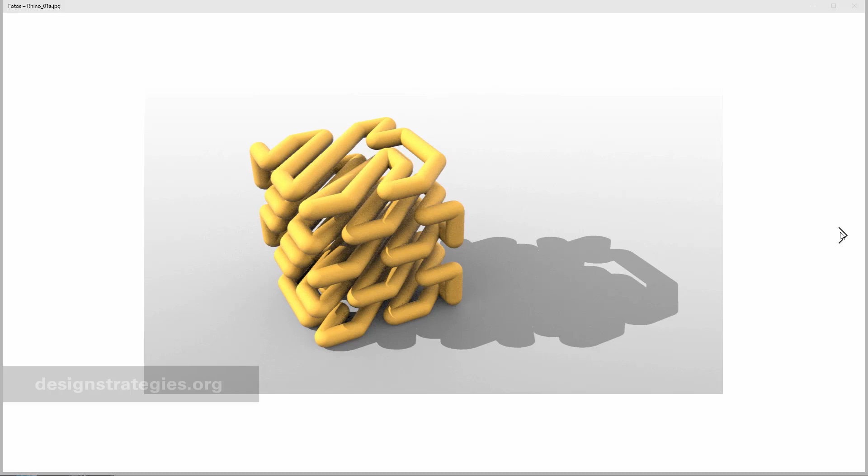You can also show the dimensions in your visualizations or renderings, and also the edges. You can also integrate background pictures, panoramas, and integrate this in your environment.

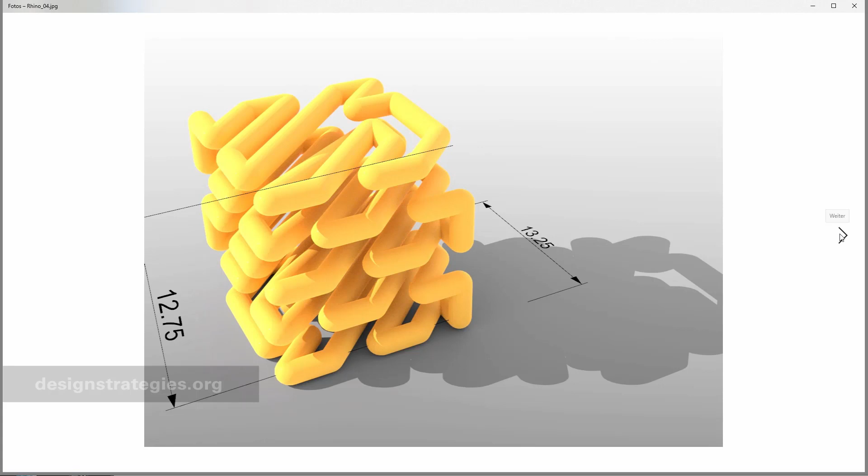You can also use the new Cycles GPU renderer, which gives really nice results if you have a fast graphic card. You can also just use technical drawings, for example wireframe drawings, or if you want a different quality, just use Make 2D to get results like this.

Okay, let's start. If you want to create visualizations, the first thing I recommend is that you go under Safe Frame and check Show Safe Frame in Active View, because this guarantees that at the end of the day you know what kind of final visualization you get, what proportions you have - it's the same size as your final result.

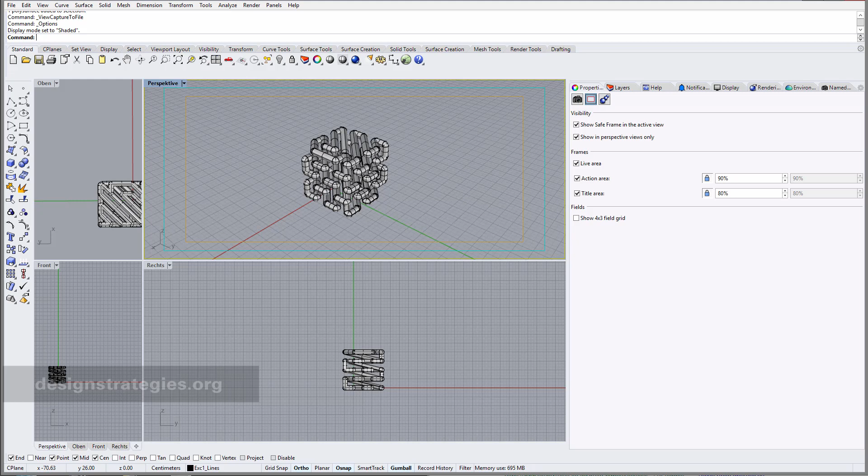This video is not about materials, but it definitely makes sense to give your object a nice material. I just select my object and in the property setup under materials, I go on material, and I don't want to use the layer material.

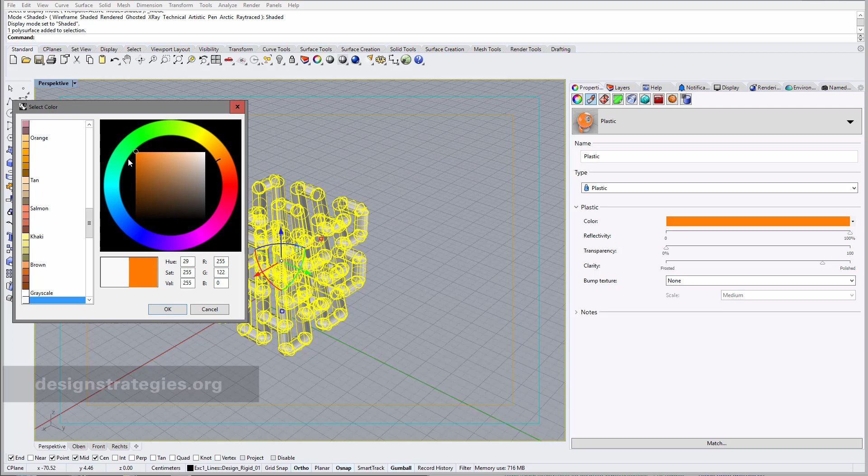I just use a new material, and then I have a long list of options to choose from, and I just choose plastic, which is fine. I'll give it a color, for example orange, or whatever.

You can already see it in the preview. Bump texture - I choose some dots, and we just see the final result in my visualization.

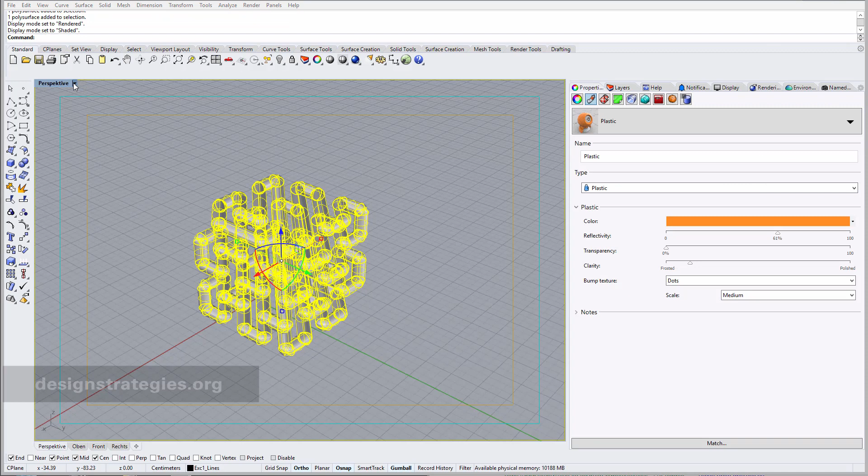And if you then change in your viewport setting with this little triangle here from shaded view to rendered view, then you can already see the result.

In Rhino 6 you have two nice options for creating a rendering. You can do it while you're in real-time viewport rendering - you just go into this pull-down menu and choose capture, and you can capture to clipboard.

And then you can copy it into something, or you just go into capture to file, and you have different kinds of settings, resolution, and things like this. We'll talk about this later.

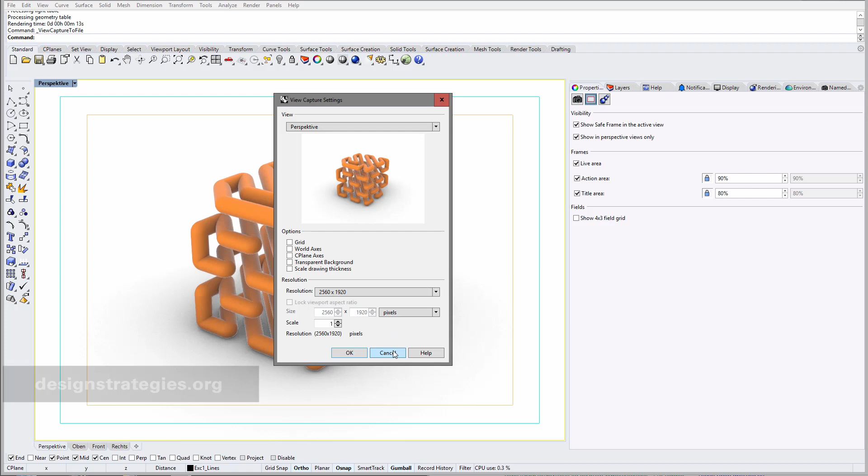Or you can also go into your render settings here in the right menu. This is more the traditional way, and there are a lot of options. We will also talk about this a little bit later.

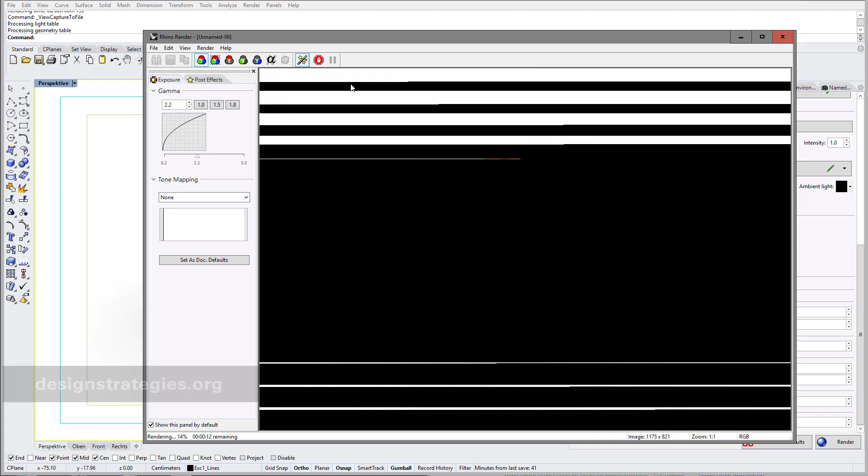And if you set this up all properly, you just go into render and it will open this kind of render menu, and it will be the traditional standard rendering in Rhino.

I think most of the time you do your basic settings in your rendering menu, and then you just use the viewport renderer. You can see what kind of options you have - you can use it for wireframe rendering, and if you go into capture to file, you just save it as your wireframe. You can choose shaded view, or rendered view, which is really fast.

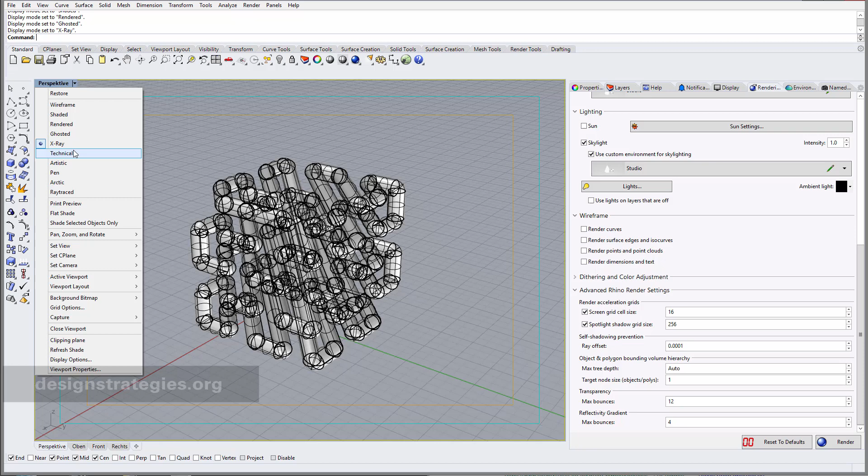You can use ghosted, you can use X-ray, and important to me, you can use technical. Technical is sometimes quite handy for these kinds of technical visualizations.

You also have other options. Artistic, not really interesting for me. Pen could be interesting. Arctic, not interesting.

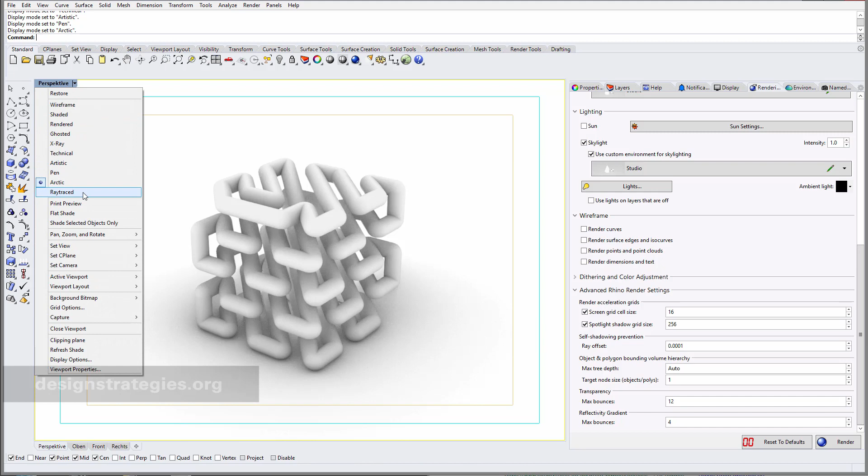And really important is the ray traced view, which is new and based on a GPU Cycles renderer. If you have a fast graphic card, this is a really good option to get really nice visualizations.

We'll talk about this Cycles mode a little bit later. I want to stop this - you can see my mouse, and there's something like a play and pause button. I just go on pause, and this is how you stop the process of your visualization.

You can already see the dotted elements I set up in my material. I just go into my settings again and choose technical, and I want to show you a few things. Every display mode setting has settings you can change.

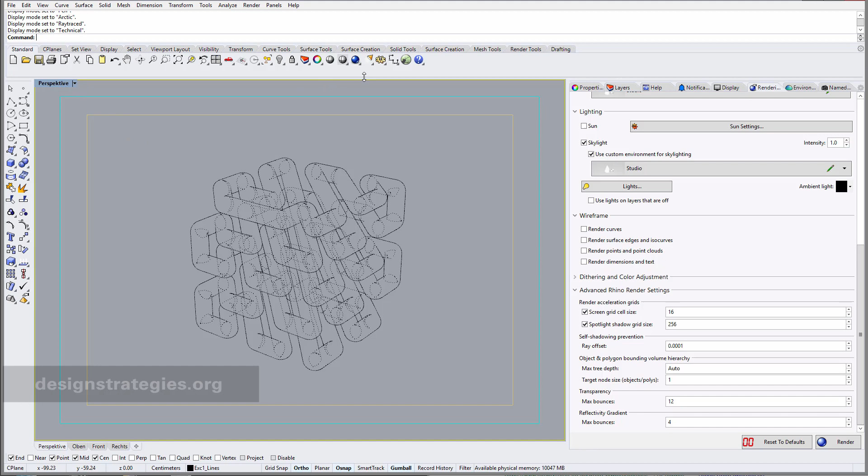If I go into options, you can see the Rhino options will open. You can go into views and into display modes, and we'll just play a little bit now with our technical settings. In our technical settings, you can choose the background.

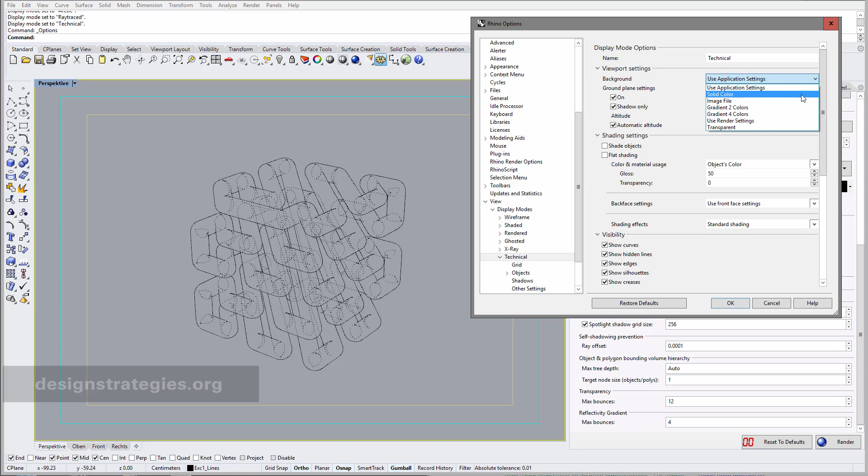For example, just say you want to have a solid color, like white - makes sense. Can also do it for black. You can have a ground plane and have the same as in your render settings, which is set up here, which also makes sense.

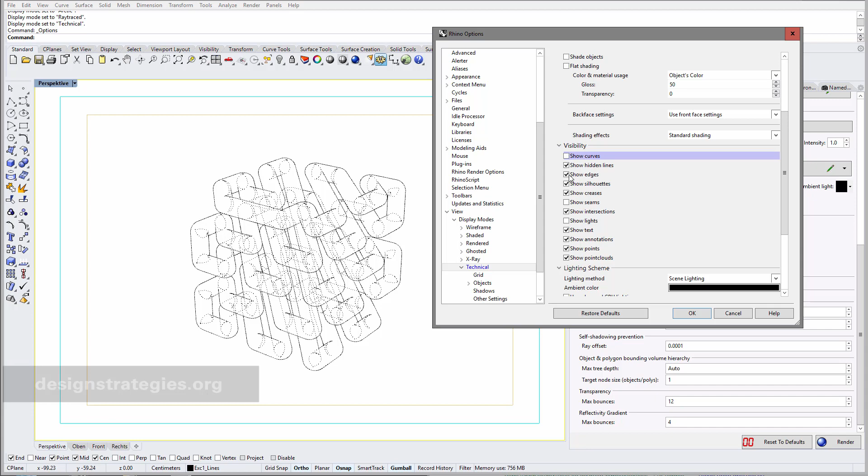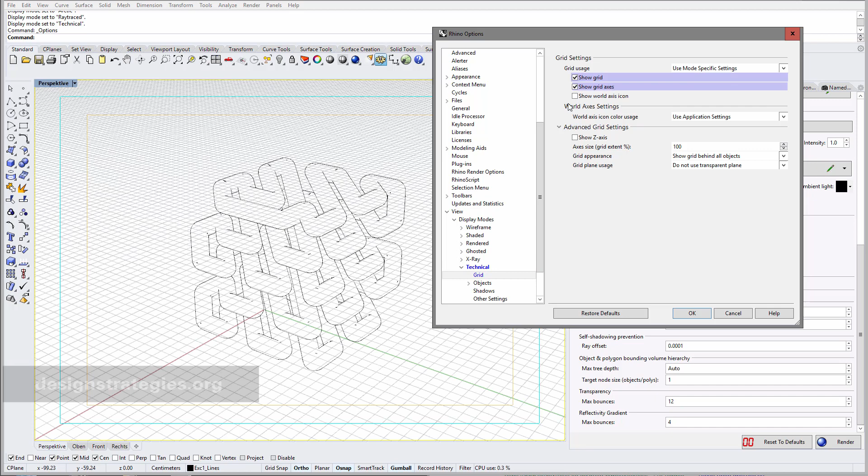There are also other things you can do. You can say show curves or show edges, and you just see what is happening. Show silhouettes, show creases, and hidden lines. Let's switch this off, so you can see that you can design your settings. You can also just say that you want to have the basic grid in the background, or the grid axis and world axis. So there are a lot of options already in your technical view, shadows and things like this. Just figure it out, makes sense to be aware of this.

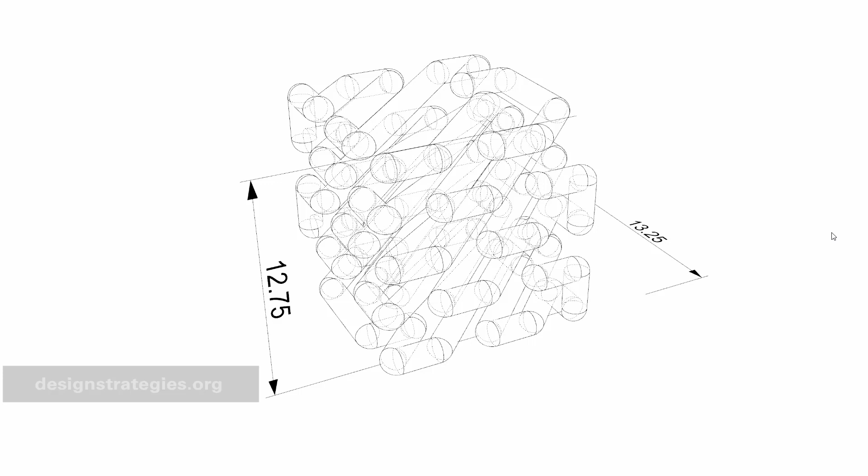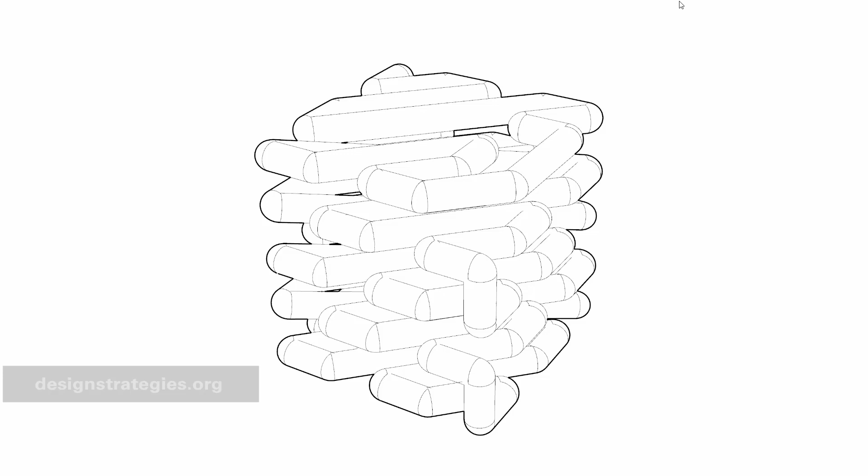One thing about technical drawings: if you save them and make a visualization out of this, sometimes it can happen that the lines are quite thin and it's difficult to adjust this. So in this case it's better to make a 2D projection and then be able to work with the thickness of the lines. I can just show you how to do this.

Okay, I have my model. I can change it, for example, now to a shaded view. Anyhow, I have it selected. I just enter in my command line Make2D. Okay, here we go. I want to have it from the perspective, and I want to have the view from input object. Here you can also choose what you want to see. The hidden lines probably I don't want. I want to have the scene silhouette and things like this.

It creates its own layer. By the way, I activate hidden lines, and it creates its own layer. Okay, here we go, just take some seconds.

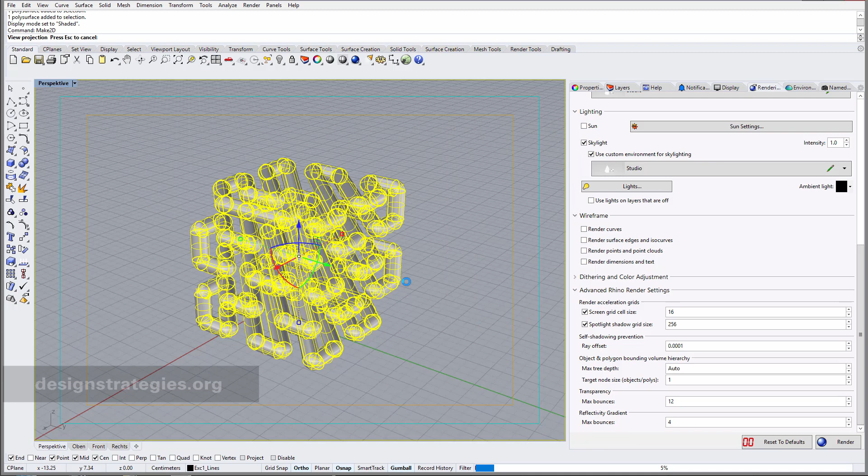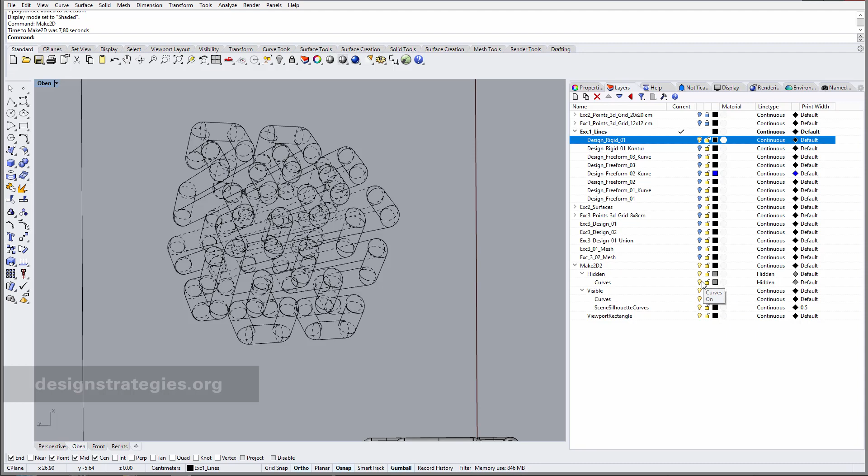After calculation of my Make2D, I just change to my top view. By the way, double click, and double click on my top view. If I now look into my layer manager, you can see a layer called Make2D, and you can still switch on and off, for example, the hidden lines, the curves and the silhouette. These are all things you can still adjust.

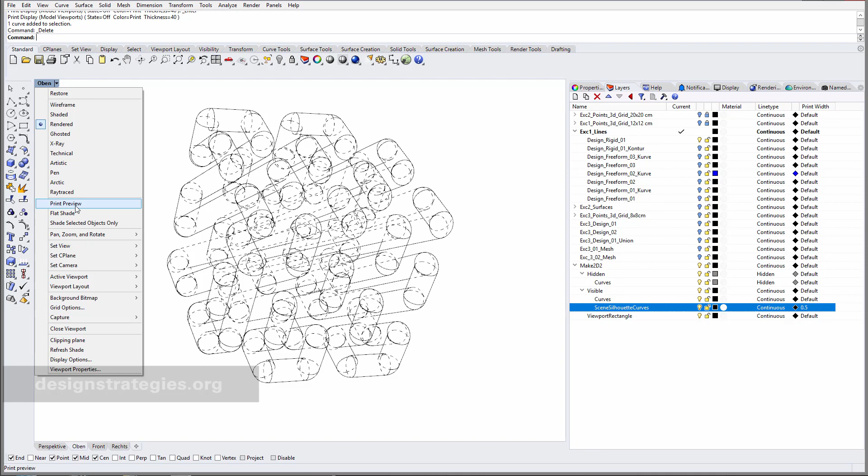But by default, these are all print width for printing. Because of performance reasons, you don't see it in your viewport, and then you also will not see it in your visualization, so you have to switch this feature on. Just go into the pull-down menu and say print view and rendered. Then you can already see that it changed.

If I just change my scene silhouette curves to another thickness, like 1 millimeter, then you can see the difference.

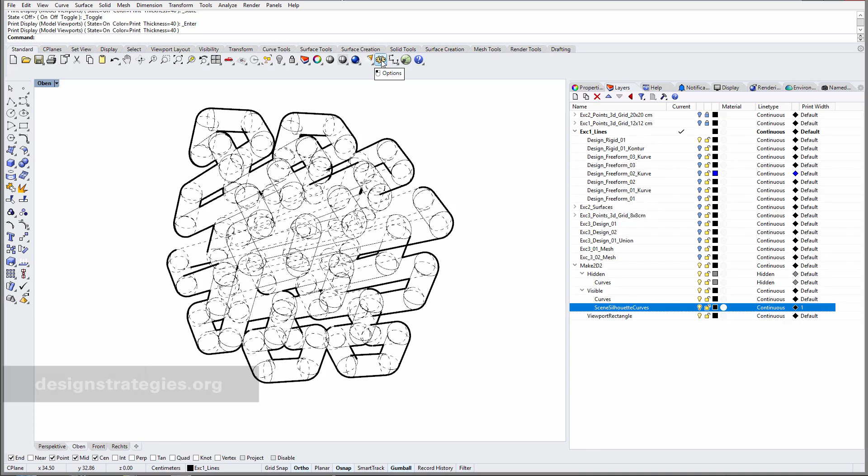If you want to save it as a transparent visualization and you are just in rendered mode now, then you have to go into your option menu, and under rendered you change the background, and instead of using render settings you just go into transparent.

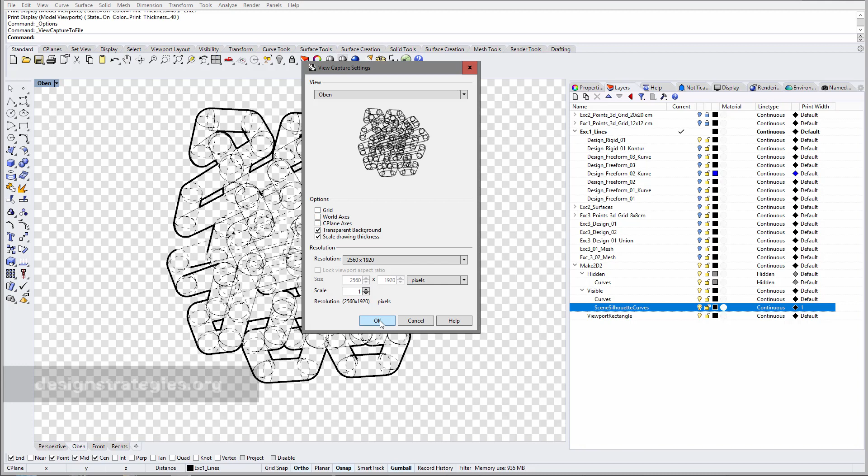Okay, here we go. If you want to save this for working in Photoshop or whatever, you just open your view capture again. You go in and see what you want to change. Transparent background I also want to change. Want to save? I'm sorry, and you just call it transparent and as a PNG, and I save this.

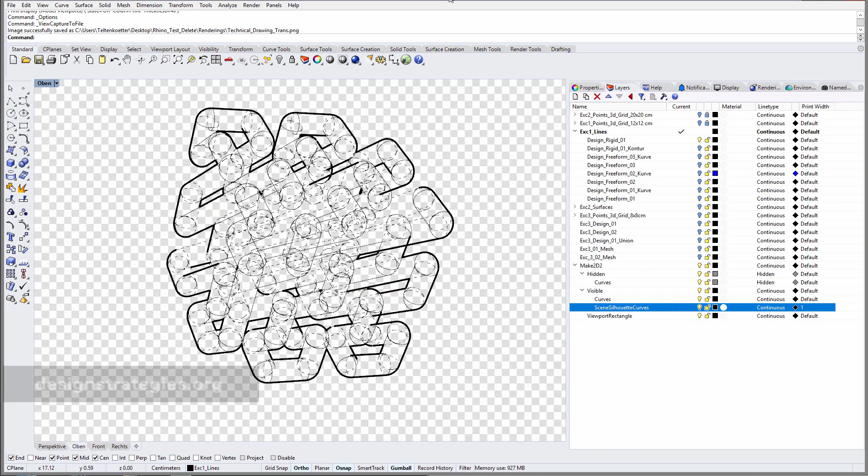Okay, I toggle again to my perspective with Control and Tab, and I have my perspective. This I just want to delete, and I also switch off my print view because it just takes render time.

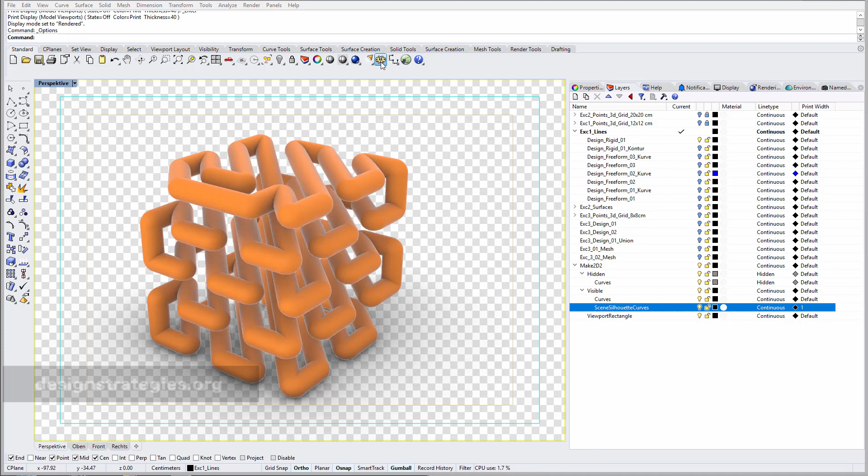Good to know, for all these settings, for example like rendered, there are a lot of options to control what we already did. We changed the background from transparent to, for example, a gradient. Now I have a gradient of 4 different colors. There are many other options.

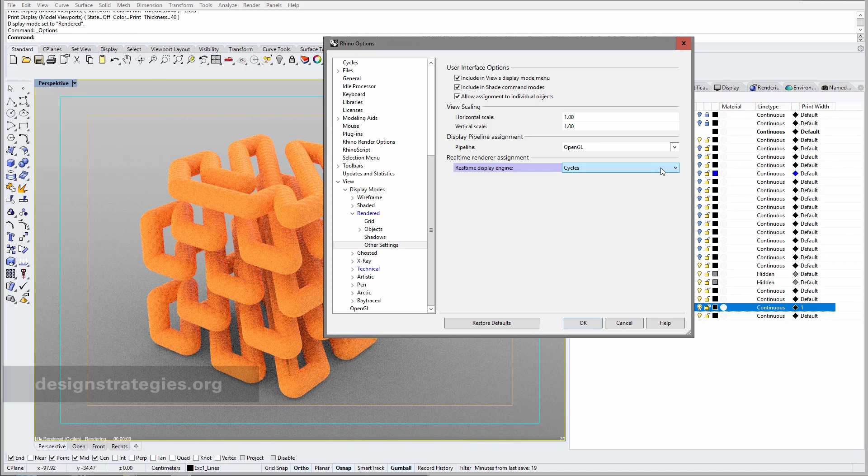There's probably one thing worth showing. The normal rendered view is done with your non-real-time renderer. There's a new renderer called Cycles. If you switch this on, then it will change to the new GPU cycled renderer. It's the same as what you find in your pull-down menus as ray trace. So at the end of the day, the whole thing is just a setup, and you can see that you can change the name of the setup, and you have a lot of flexibility in working on this.

When we next talk about ray tracing, it's also interesting to see everything under the Cycles menu in your Rhino options. You can see my graphic card is a GeForce GTX 780. If you have a GeForce graphic card, it really makes sense to use this ray trace cycles option. If you don't have it, you just visualize with your CPU. I recommend using CUDA if you have a graphic card like this, otherwise I would just go to the conventional one.

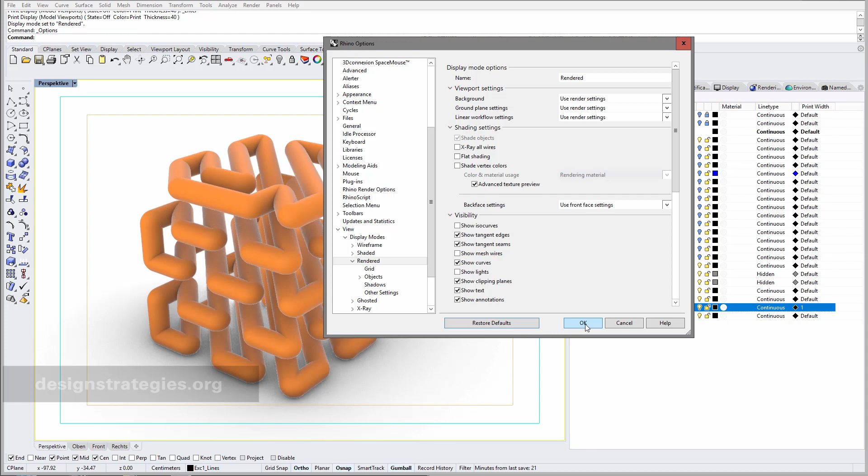If you've changed anything, for example in my render setup, it shows blue. If I go into restore defaults, you can see what you changed, then it goes off again and you have your completely normal default setting, which you had at the beginning when you opened Rhino.

The future is that your viewport will always work like this, but this is definitely not acceptable yet. What I do is go into the viewport and change this little thing to pause, and now it's stopped at 175, at my recommendation. If you want low quality, change the samples to 4. If you want a draft viewport, change it to 20 samples. If you want okay quality for your visualization, go to 100. If you want high quality, go to 500 samples.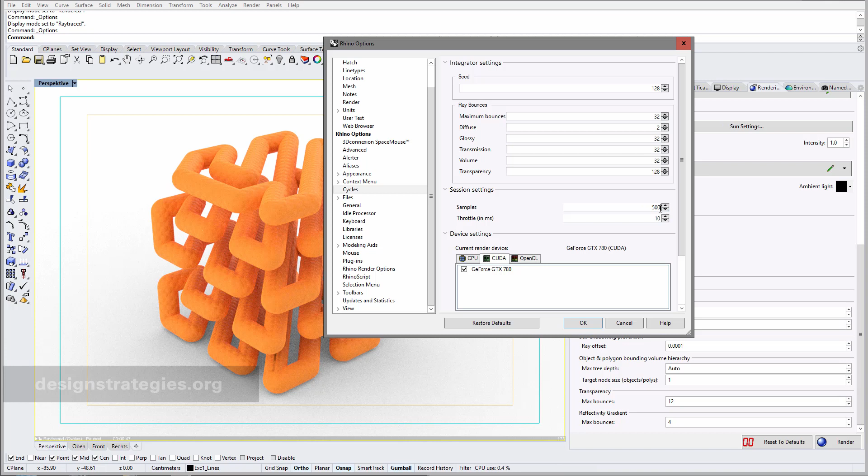If I look at the presets of Rhino, I open the presets and go into cycles, you can see the preset samples is 1000. This is absolutely too much, it takes a long time. So just for my draft, I would always recommend a max of 500, and I'll just change it to 20, let's see if we're already happy about this.

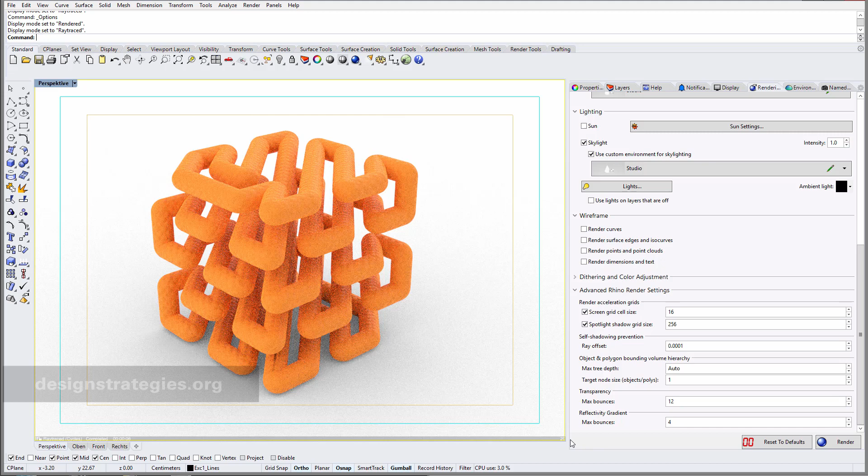I say 20, change it once to rendered, and go back to ray traced, and here we go again. Hopefully it will finish at 20, and I think this is already good. This was very few seconds, 6 seconds, and it changed.

If you turn it, it goes back to your normal render view, and if I hold it, it goes up again to 20. I'm not really sure if I want to work on this on a regular basis, so normally I just use my rendered view. But if I want to make a visualization out of this, then the quality is really good.

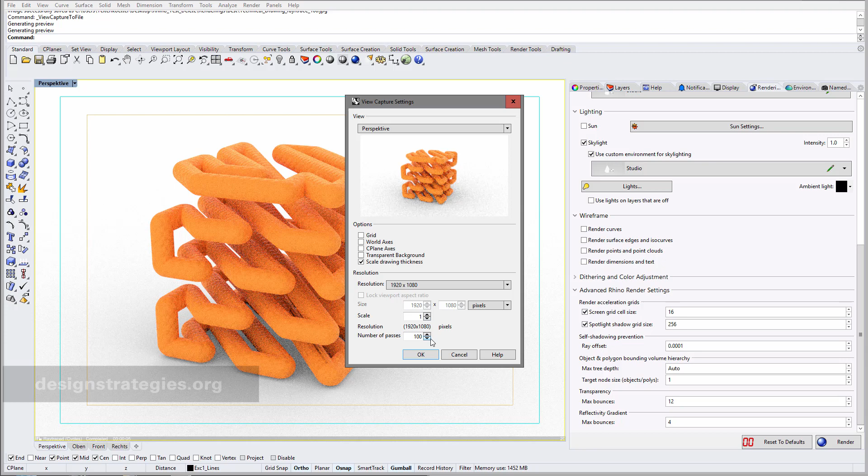I go into capture to file, and for my resolution I go to a size of HDTV, and choose this times my number of passes, like 100, and say okay. I save this as technical drawing ray trace 100 samples. Now it's calculating, and it takes some time. After 1 minute render time on my computer, the result of 100 samples looks like this.

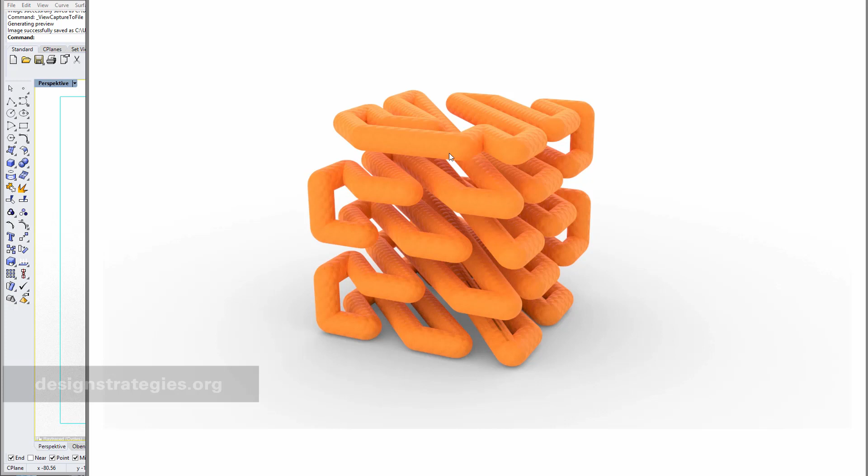I think it's pretty cool, you can still see some crisp surface here. I also did a rendering with 500 passes, and you can hardly see the difference, though there is a difference obviously. The 500 passes took 5 minutes, the 100 passes took 1 minute. And if you go back to our viewport, the 20 passes takes 5 seconds. So I think if you have complex scenes, you definitely don't want the default 1000 passes, it will never finish on our computers. You'll probably be fine with 100 passes or less.

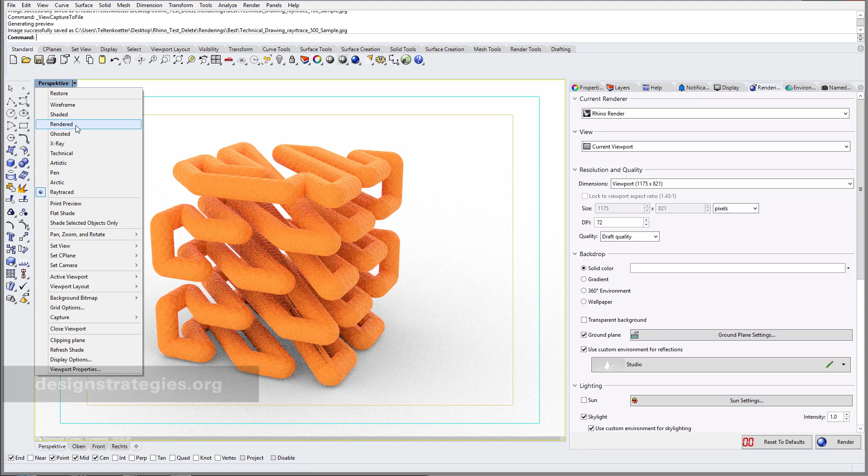Okay, the last thing, let's look at our rendering menu. I'll change back to our normal rendered view because I think this is a little bit faster. We go into renderer, and under current renderer you can choose the Rhino renderer - on my computer I don't have any other renderer installed. Interestingly, you also can't select the new Cycles renderer here; you can only do it while real-time viewport rendering.

The next thing is you can choose the view, like the current viewport, or you can say specific viewport, and then select what kind of viewport you want to choose without changing the viewport here.

It's just about the visualization. The next thing you can do is the resolution and the quality. Viewport really is a clear thing. It just depends on the viewport, and you can also see that my show safe frame is just following.

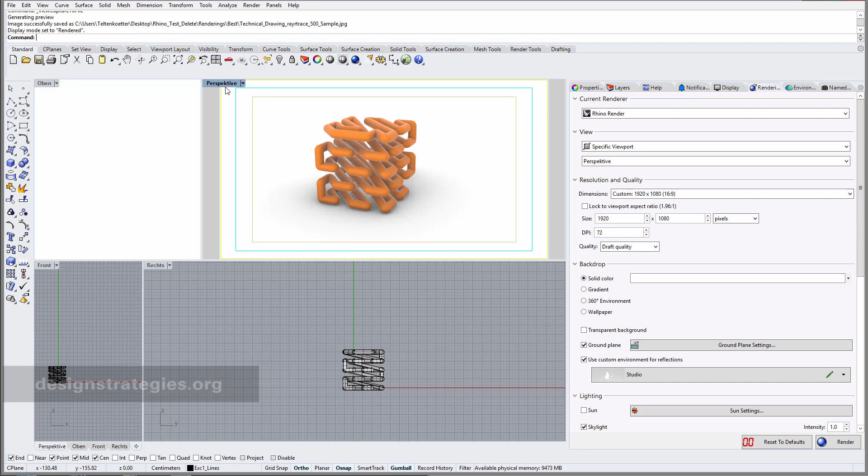But if you go to, for example, an HDTV format, then you can see that my show safe frame makes absolutely sense. You see these two arrows left and right, and if I increase my viewport somehow like this, then you can see, I just select it again, that it fits. And now here again it does not work because my viewport is not big enough.

I can just make this window a little bit smaller, and now it should fit. Nearly. Okay, now it fits.

So this is about the dimension, and you can also lock this size. So if you want to make it smaller but you like the dimension and you locked it, you can also see that X and Y are following.

This makes really sense that you only think in your final resolution, but some test visualizations you just make really small. Dots per inch is not really interesting for me, that's more like a Photoshop thing. Draft for quality, this is all about the conventional renderer. I would go via the ray trace rendering if you have a fast graphic card in your laptop or computer. So we keep it like this.

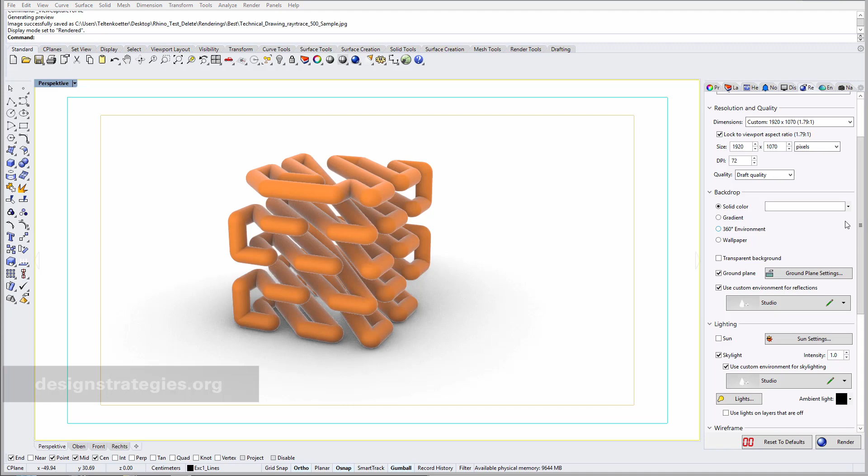Then you have different kinds of options regarding the backdrop. You can choose a solid color, for example, why not gray? Can look really good. You can choose a gradient, and you can define the colors of the gradient.

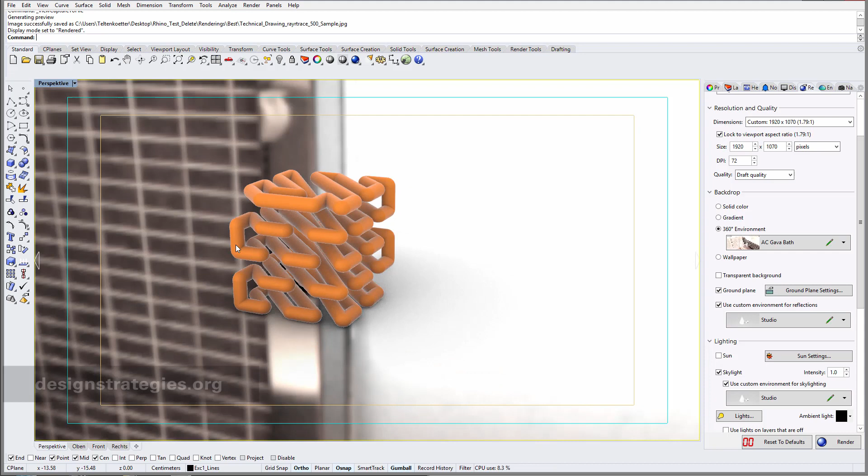You can go for a 360 degree environment map. I just open this pull-down menu and say use an environment, import from environment library, and it can be any picture. Here are some pictures I can already use, so I just use the first one and go into open. It takes a while until my background picture is refreshed, and you can see that you have now this environment at your back.

It doesn't look really convincing now because I didn't put much effort into choosing the right background and how to position it. I'm pretty sure we'll quickly find much better options. Why not just use the Rhino Studio?

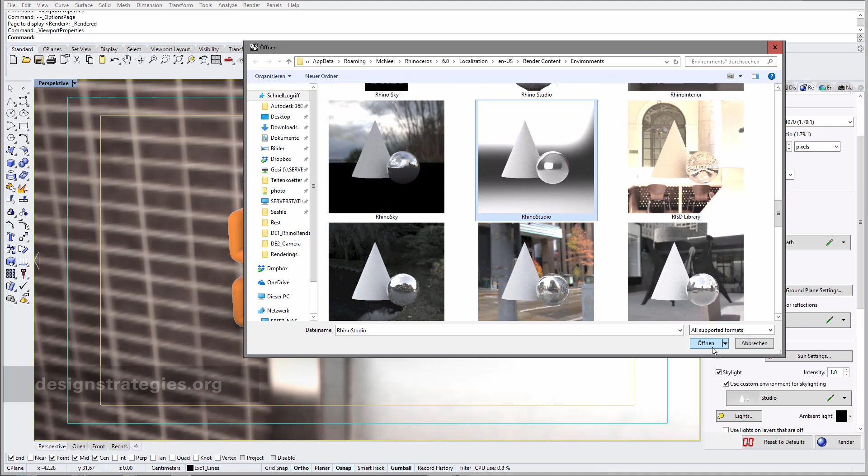Takes a while again, and now I'll zoom. Also not really convincing, but you will figure it out by yourself.

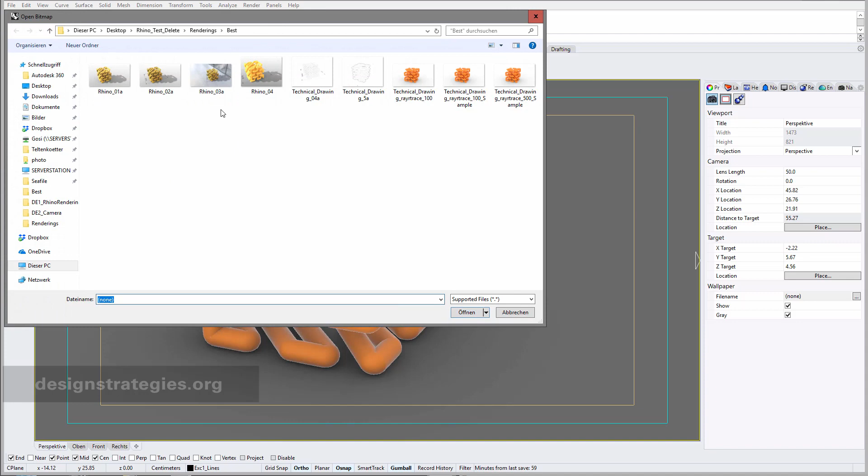You can use wallpaper, and with wallpaper we don't see anything right now because you have to load a wallpaper, and that's also something different than just a picture at the background. I go into View Properties, and under File Name Wallpaper you just choose a wallpaper, for example one of our visualizations we did, and now you can see there's an overlay of our wallpaper and visualization. If I zoom out and in, you can see it's a different thing than just adding a picture in my backdrop.

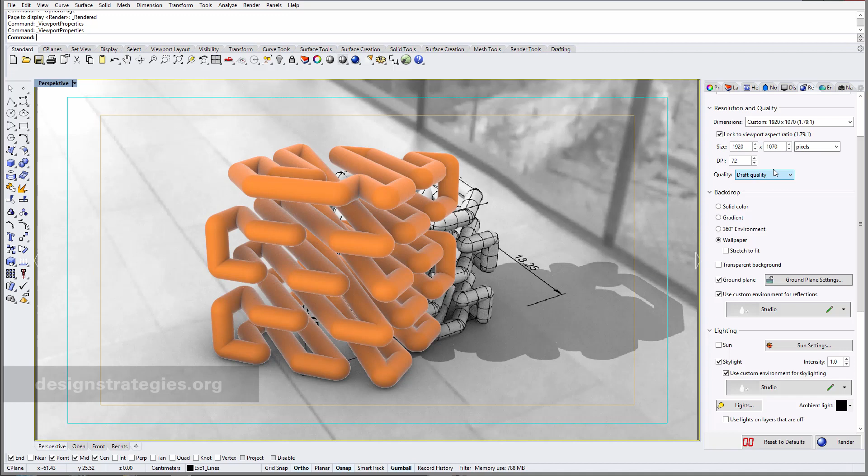Okay, going back to our rendering menu again, stretch to fit. Also should try that it fits to your visualization. It was no issue right now because the size of my visualization and this was similar.

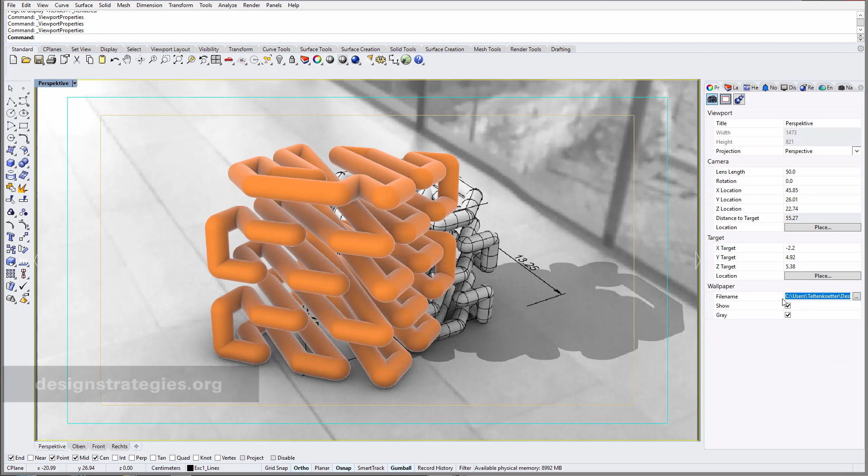Anyhow, you can use a transparent background, and I go back to my gradient or my solid color, and interestingly I still have my back wallpaper and my scene. So what I do is go again into my viewport options, and I just delete my settings, and go back again, and now you see that my wallpaper is gone.

Ground plane, you can switch on and off your ground plane, which is really good for visualization because then you can already see a shadow underneath your object. So I always would recommend working with a ground plane if these are objects like this. It's a little bit like your own little studio. You can choose environments for your studio, and this is also something you can play with and figure out by yourself.

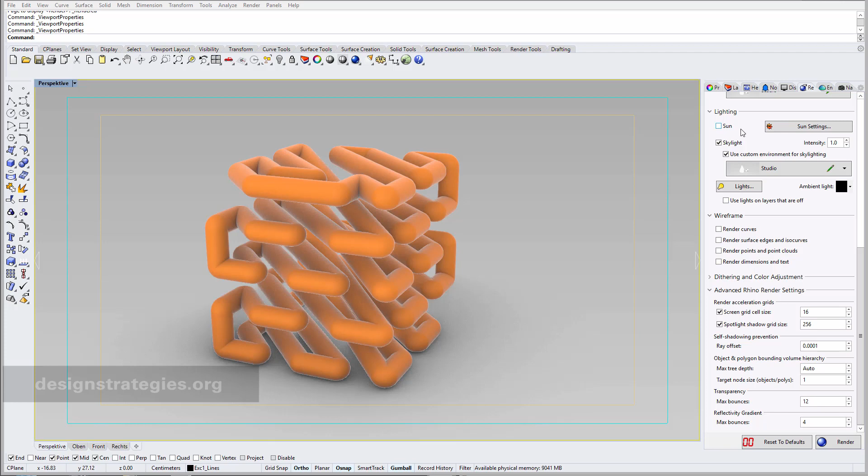What's really interesting for us, we just use Rhino for basic visualizations. We are not working with V-Ray right now, just basic visualizations, but you have the option to switch on sun. And the sun is really good because you get a really clear shadow, and you always have this basic skylight. If you don't have it, the whole scene doesn't look good anymore, so I would just keep it like this.

Interesting for you is looking at your sun settings. I just open the sun settings, and you have the option between sun options manual, and you just change it by date, time, or use manual control. What I want to do is use the automatic settings, and first good to know is never orient your object to the sun, always orient the sun to the object because you want to work in orthogonal mode.

So when I change this, for example, you can see that I turn the position of the sun, and you can also see that the shadow is actually turning. So you just have to see from where's the north side of your plot of land, and then adjust it to your object.

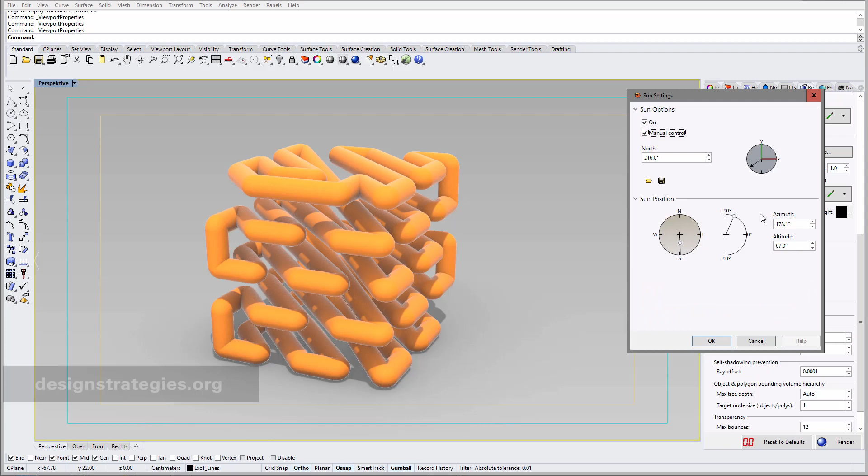I can't do any changes here because I went on sun options, not manual. If you switch on manual, you can do it manually, but I don't want to do this right now.

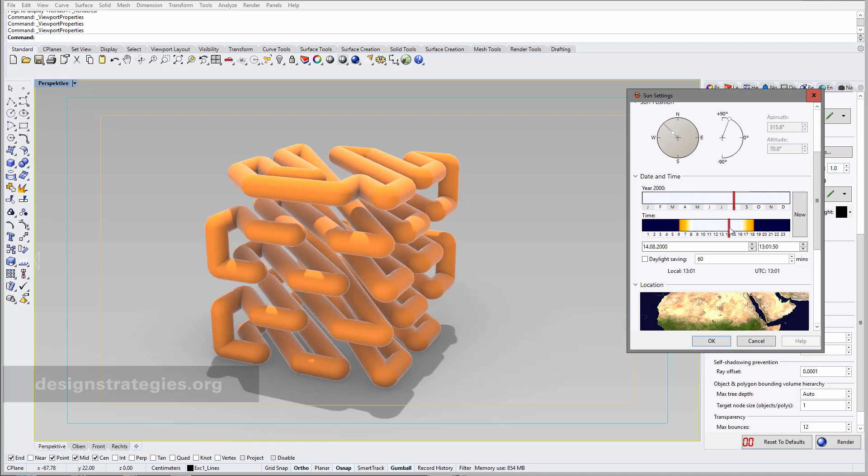I just go into my date and time, and you can see that you can change the year, and you can also enter the year. You can see now I'm in April, now I'm in May, July and August, things like this. You can change the time from the morning, and you can already see that it gets a little bit more of a warm color and a cold color. Also here you can enter the exact time you want to have. These are things you can do.

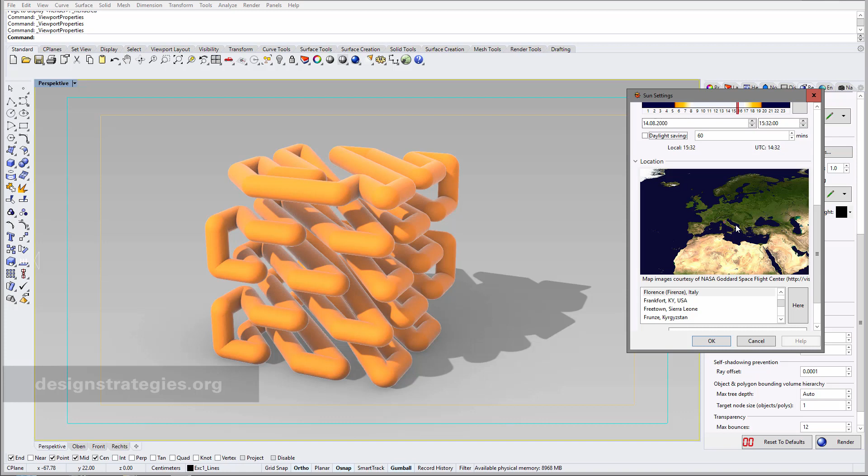And you can also choose, really important, the location. Under location, you already have a selection of places you can choose, or you can just choose it in this map by clicking with your mouse. Now I'm already in Italy, and then also direction of Germany, and you can also just...

Search for a location, or just enter the latitude or longitude value. If I enter, for example, Mainz in the internet, you can see that the longitude value is 8.2, and the latitude is 49. If you enter these values, then you have the precise data files of your location.

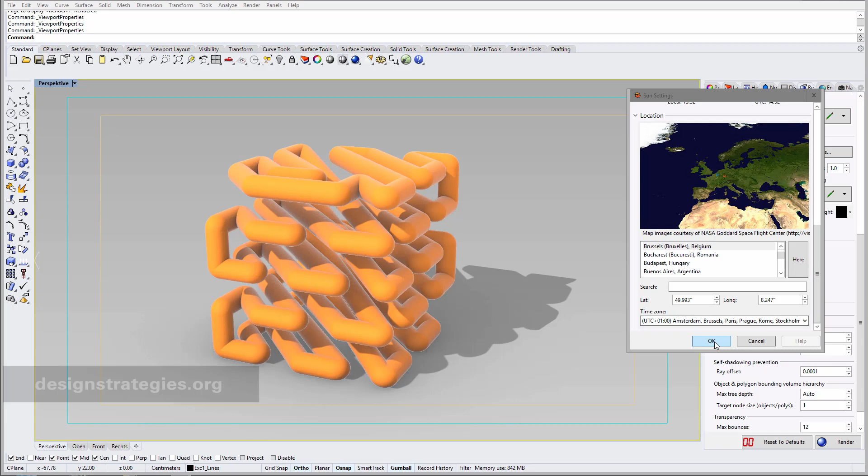Under lights, you can see all your lights. I have a skylight, I have a sunlight. You can also obviously add artificial lights. You find them in your render toolbar: spotlights, point lights, directional lights. We're not talking about this right now.

And the last thing I would like to have a look at is this wireframe mode. For example, if you just activate render dimensions and text, and if I add a dimension in my visualization, somewhere like this, then you can also have this in your visualization, and you just have to activate it.

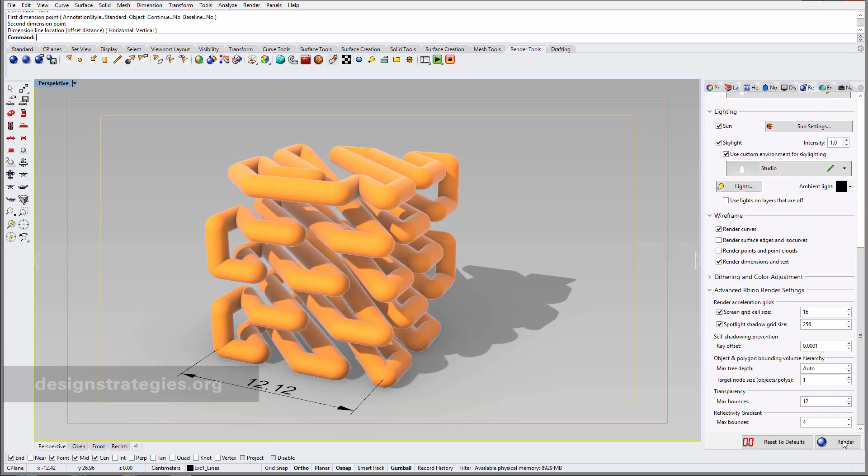Or you can also render your edges and your curves. I just enter curves and we just switch on rendering. I control my size, and locked window I have activated. For me it's a little bit too big, so I just scale my visualization down to 800 pixels. I click on rendering and we can see that the conventional normal render menu is open. I can also see that I made a mistake because I obviously still have transparent activated.

I'll just stop this, go up again, and switch off transparent background. I don't want this, and I go again into render. Looks much better, like I expected.

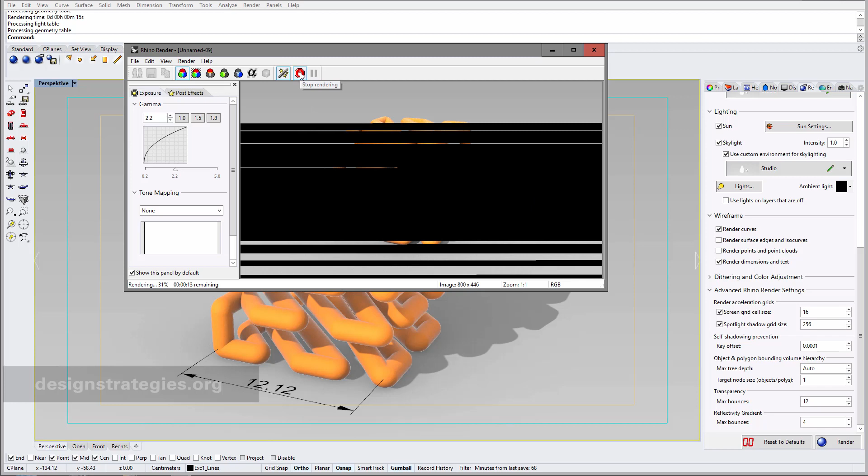You can, by the way, always stop your rendering, obviously. And after a really long time of several minutes, you can just see the final result. That's also why I don't really want this kind of rendering method. For me, it just takes much too long. Ray tracing or other programs like V-Ray are much faster. But you can see that's the final result, and at the end of it, it will just add your dimensions.

And if you go into post effects, you can also see that you can switch, for example, your annotations off, and if you would have rendered your curves, you would also be able to do this, and also some other settings. You can just play with this. I definitely don't want this noise.

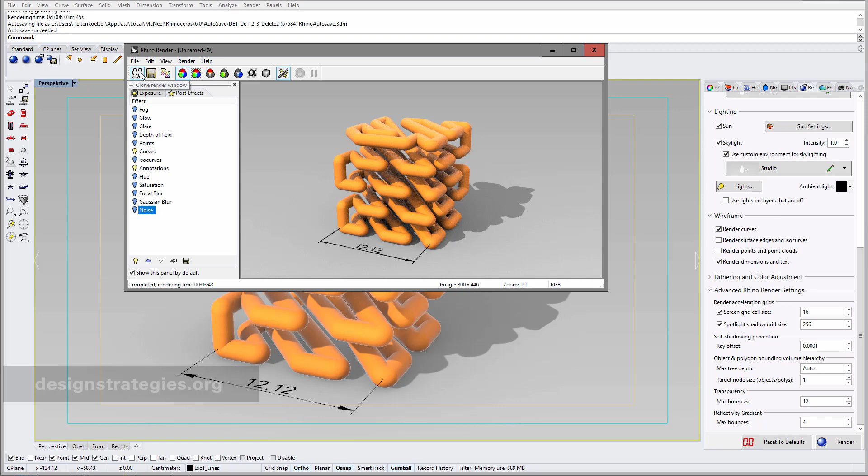Also good to know is if you have several visualizations, you can just clone this window, and if you're happy with this, you just save it. Different kinds of options, as a JPEG for example, as an HDR file with all the information in it. So there are different kinds of options, or as a PNG.

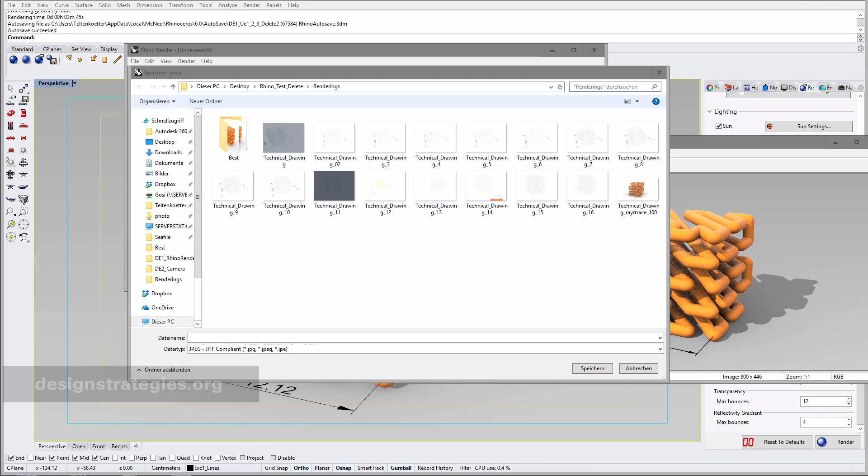The interesting thing about this menu, even if you can't choose your real-time ray trace renderer here, if I just change in my pull-down menu to ray trace, then you can see that it just uses all the settings. It uses the daylight system, it just uses your annotation dimensions, everything is there. This was a quick preview, and if I just do my visualization with capture and capture to file...

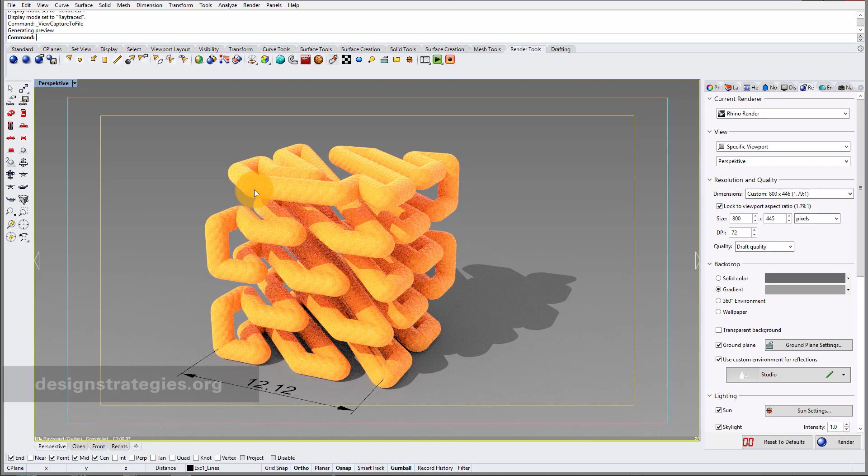Then you can see that everything is a part of this, the light and the dimensions. So my recommendation is, if you want to have a great visualization, use 100 number of passes, so it doesn't take too long. Go and use your raytraced visualization. Just use this for a basic setup.

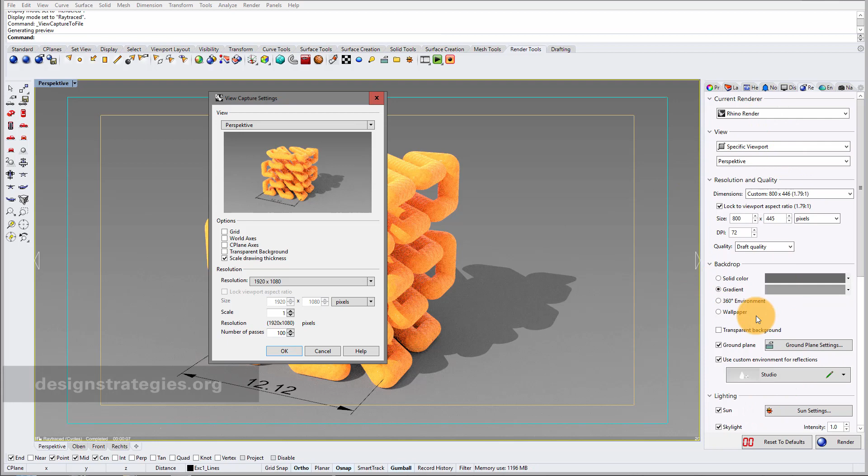Okay, this is what it looked like before I did my settings in terms of sunlight and background, and this is what it looks like when I set up all my rendering menus, and I think this is really good. Thanks for watching.